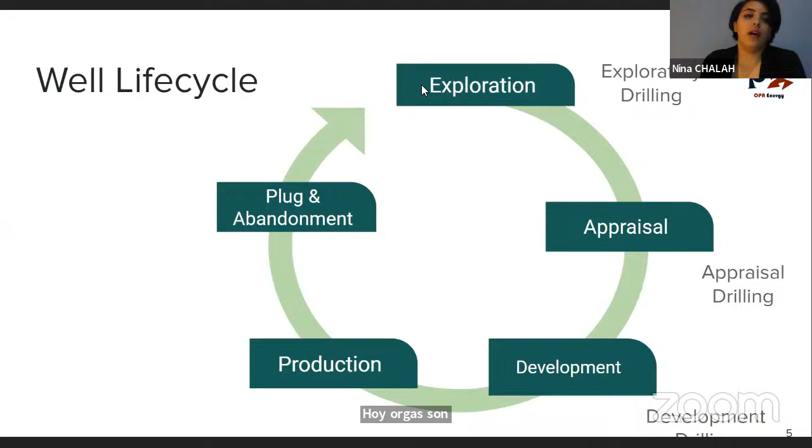So what they do is mainly making assumptions about whether we have oil or gas. So we have what we call seismic data acquisition, and the geophysicist guys are there to make what we call percussions. So how can I say it? Like they beat the earth, like this, and they are getting what we call seismic data.

And based on this seismic data, there is a whole interpretation in geophysics, but it's not the topic of today, and it's not my major though. So they are processing the data we are getting from the seismic activity, and we are interpreting it. Once we are done with this, we are going to tell the drill engineer if yes, there is a probability to find oil or gas underground.

Okay, so after this we will begin with what we call exploratory drilling. So mainly, this is the first operation to confirm if there is oil or gas underground. So exploratory drilling is quite difficult because we do not know the nature of the rocks we are dealing with. We do not know what's underground. So mainly exploratory drilling is here for this purpose, in order to explore what is underground.

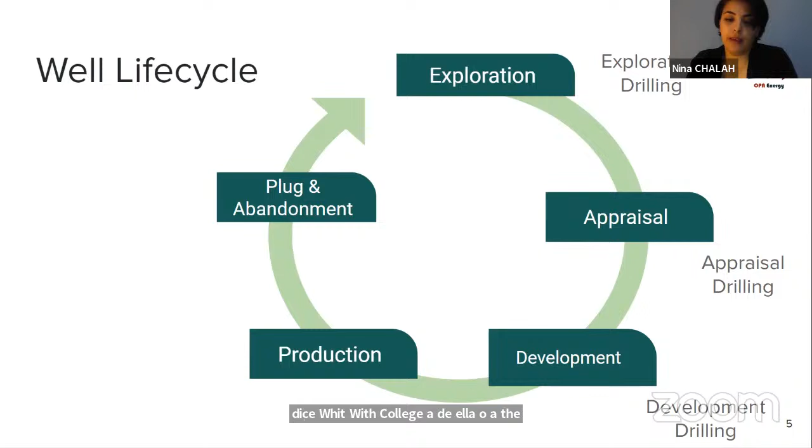which is development. So there is what we call development drilling. This part is mainly made in order to drill more wells and to get to produce. Okay, so this is why we call it development. We are going to develop the area or the field. After this, there is production, and during production, we will have to pump the oil or the gas from the well right to the surface and produce it. And it's a whole story, but it's not the topic of today.

And during this same phase, we will also have what we call EOR stimulation in order to enhance the productivity of the reservoir. So it's also not the topic of the day, but just in case. After this, we have plug and abandonment. So everything dies, even an oil well. So after we produce from it, and the reservoir does not have that power or that pressure to produce, we are going to plug it and abandon it.

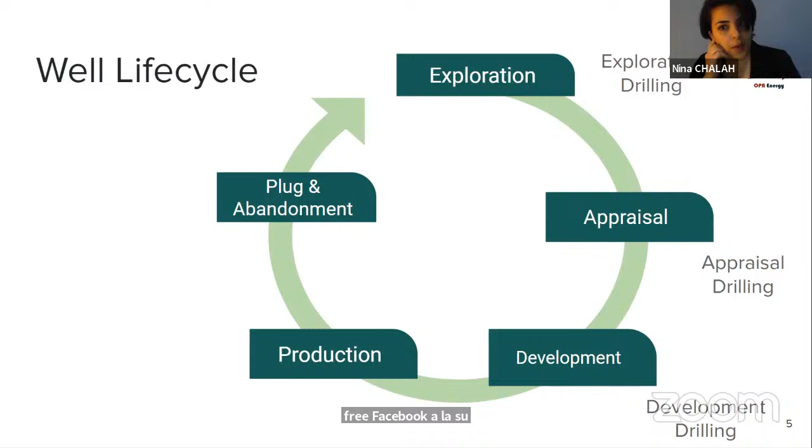Yeah. So as you see here, drilling is actually in the first three phases of the well life cycle. So a drill engineer, a drill supervisor, drill crew are actually intervening in all the first three phases of the well life cycle. Okay, so to summarize, drilling is mainly constructing a well, and we construct this well in order to explore, assess, as we said in the appraisal phase, or develop a field to produce oil and gas. As simple as it is.

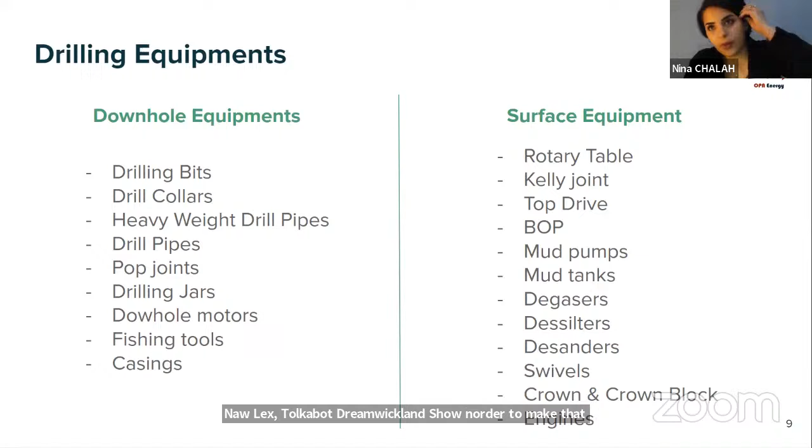Now let's talk about drilling equipment. In order to make that hole, we are using a lot of equipment. The principle is the same everywhere, but the technology is not the same. We may use the old drilling, mainly using Kelly joints and rotary table, or today's version, which is using the top drive. The system is the same, but using the Kelly joints will require a lot of time.

And actually, the top drive is here to help us make fast assembling of the drill pipes. So the top drive is a technology replacing the Kelly joints and the rotary table. So I split the equipment into two types. We have the equipment we are using downhole, and the equipment we are using at the surface.

Okay. So let me check the chat first.

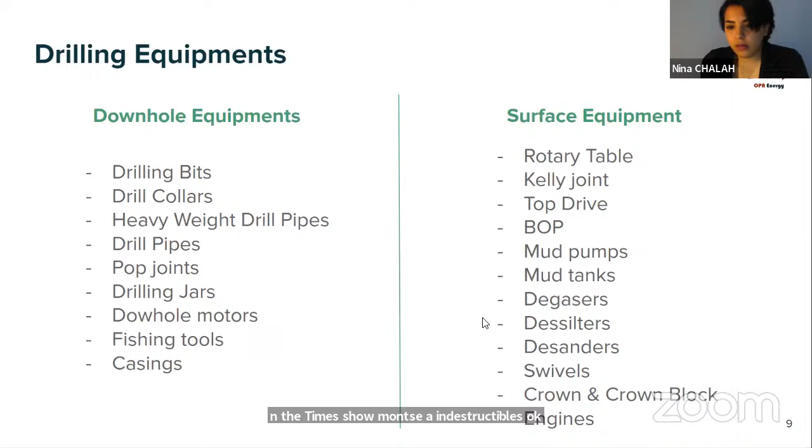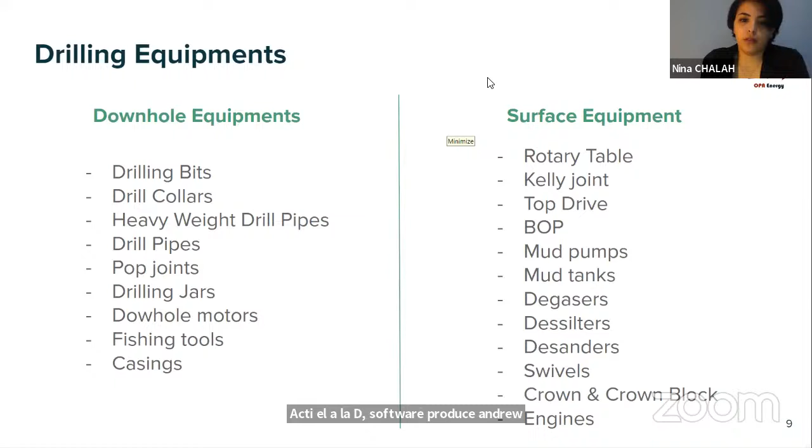Drilling is part of oil and gas production? No, it's not a part of it. Actually, production, as I explained, comes after the drilling. So we are producing right after we made the hole. We drilled it. Yes. So reach the production reservoir exactly. That's it. So let's get back to the slide.

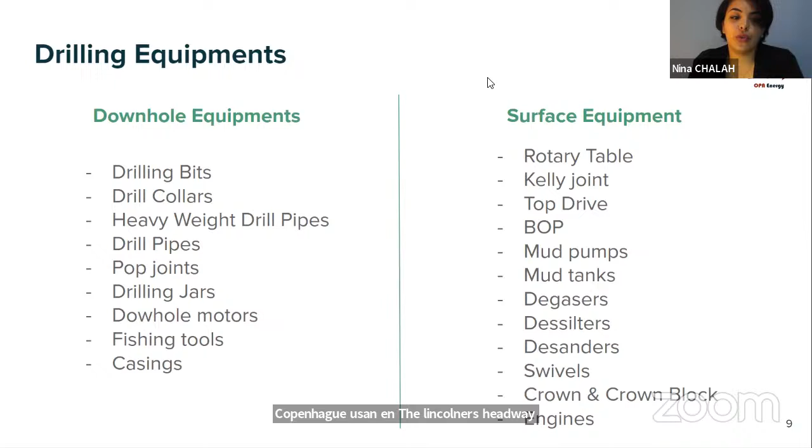So what we have here, as I told you, is what we call downhole equipment. It's mainly all the equipment we are using downhole: drill bits, drill collars, heavyweight drill pipes, pup joints, drilling jars, downhole motors, fishing tools, casing, etc. The drill bit is the first equipment that is here to drill, and it gets into contact with the rock. I will show you in the next slide some pictures of it.

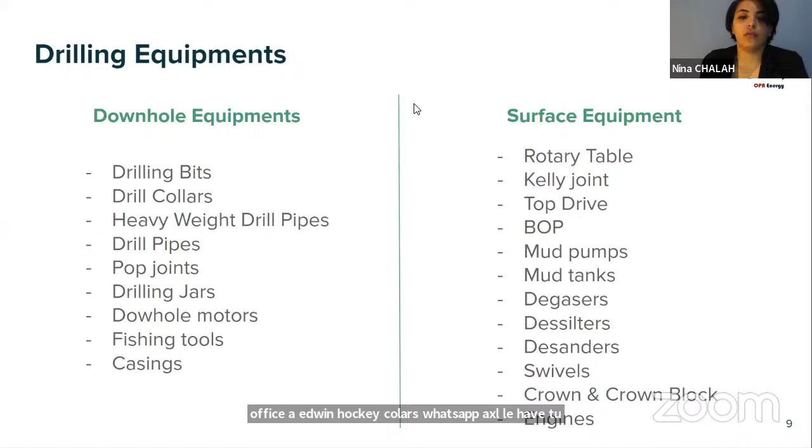And we have drill collars, which are heavy drill pipes, used mainly to provide weight to the drill string. Sorry, I need to accept this guy.

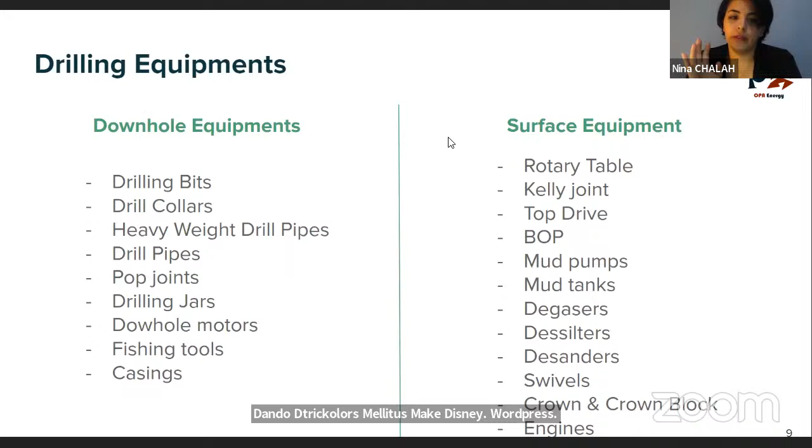And we have heavyweight drill pipes that are here to make a transition between the heavy collars and the drill pipes. It's less heavy than the drill collars and heavier than the drill pipes, so they are here mainly to make this transition. There are what we call pup joints, which are small drill pipes, mainly used for the need. A drill pipe nowadays can have about 30 feet, and the pup joint is less than that.

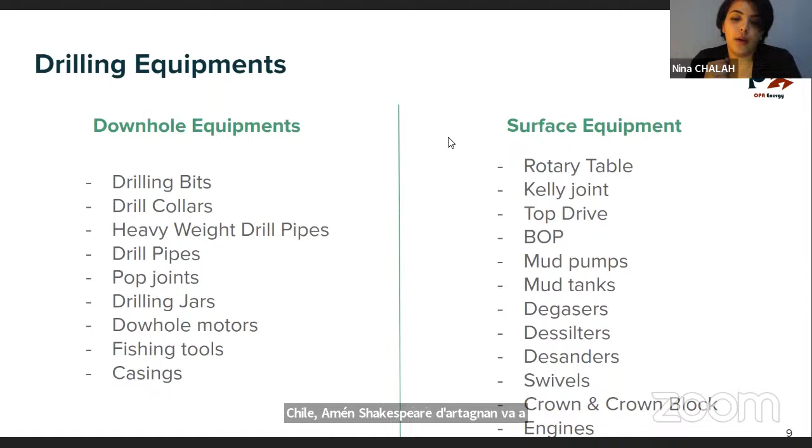So it depends. Then jars are mainly used when stuck. We have hydraulic jars and mechanical jars, and these tools are mainly implemented to provide some shocks to the stuck pipe zone. Yeah. We have also downhole motors. These motors are

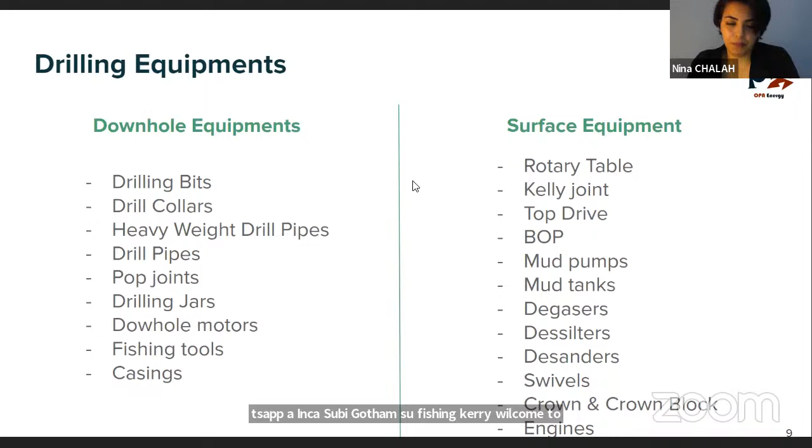And we have LWD tools, which are here to gather some logs, so it's logging while drilling. We have also fishing tools: overshots, baskets, and so on. It's another topic, I cannot really explain the fishing tools, but they are used in case we get a fish downhole. A fishing crew will come to the location and run these tools downhole in order to fish the fish. Yes, and we have the casings.

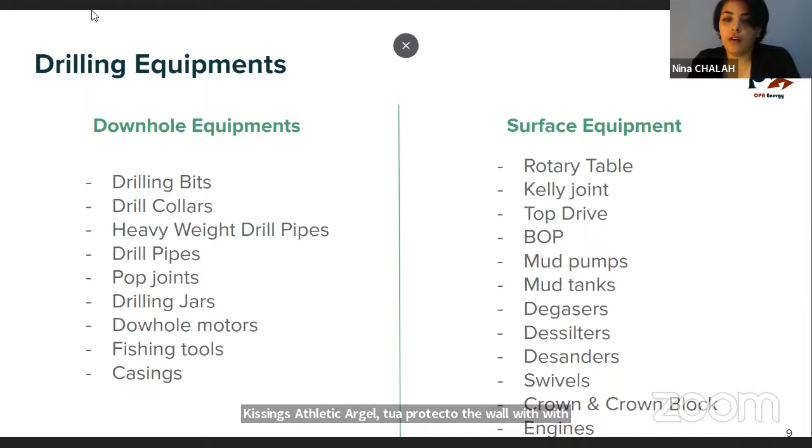The casings are here to protect the well while we construct it. As I told you, there is also surface equipment: rotary table, Kelly joints, top drive, which we are going to see in the next slide, BOP, mud pumps, mud tanks, degassers, desilters, desanders, swivels, crown blocks, and the mobile crown also. And we have, of course, diesel engines we use on location to run all of this equipment.

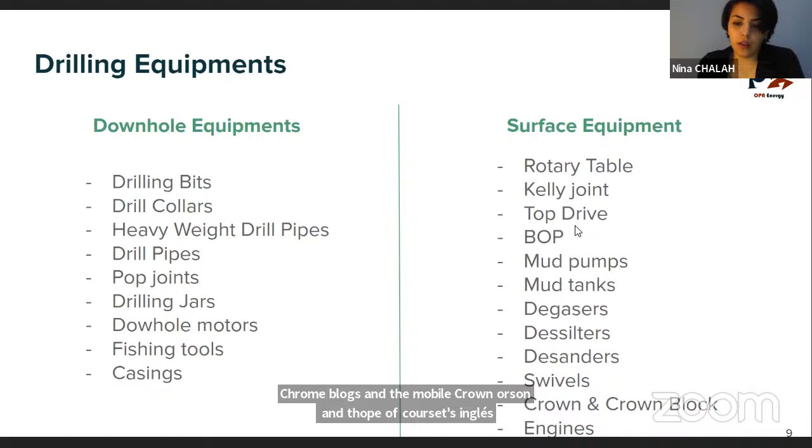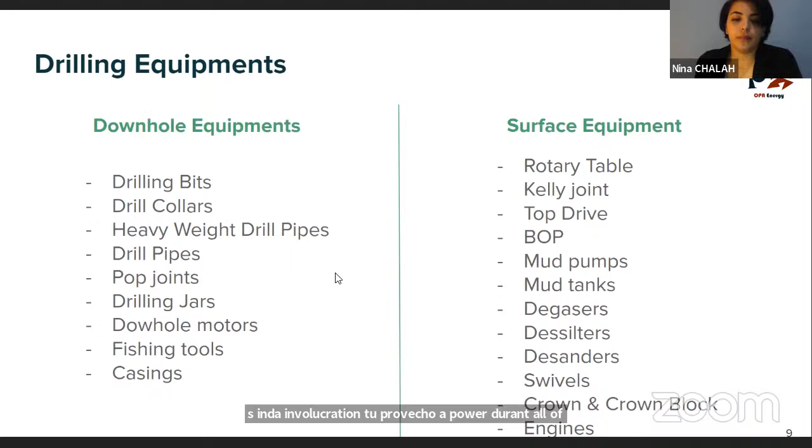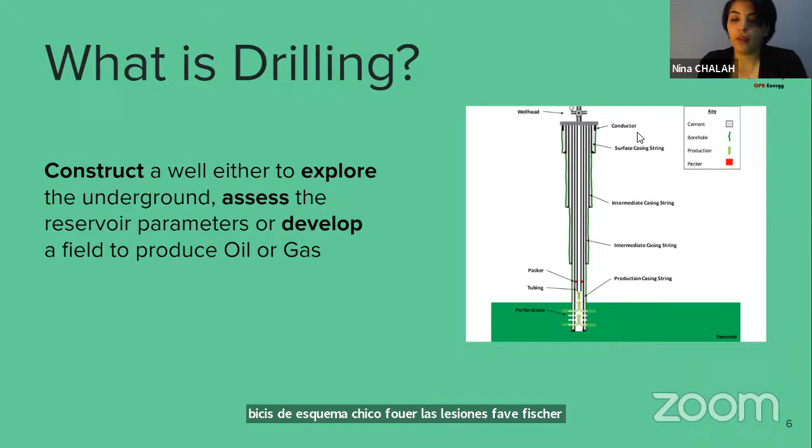So we have surface casings, we have intermediate casings, and production casings. We have also liners. It's not here, but actually this is the schematic of a well. Mainly, we have, let's name them, five phases, counting the conductor pipe. Okay. So let's get back to this slide. I think that I am done with it.

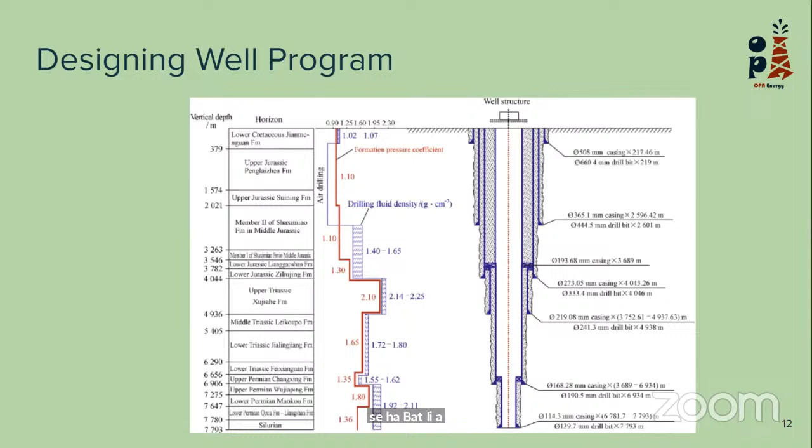Here they are using first air drilling, which is actually a type of drilling. To be honest, from my side, I didn't see this air drilling, but it exists. So actually, we are pumping air or gas in the well. We use this air drilling mainly for the first phases. Okay, right after this they are using, this is the formation pressure.

So they are using drill fluid, so they are using mud with its density. As you see here, 1.4 to 1.6. So we are going to actually construct this well in this manner, using mud, and the design of it is all about what we call a mud window.

So we have what we call a collapse pressure, and we have a burst pressure. This is for casings, and we have also the pore pressure and the fracture pressure. We have to make sure that our ECD, or what we call equivalent circulating density, is in between these two, pore pressure and fracture pressure. Okay.

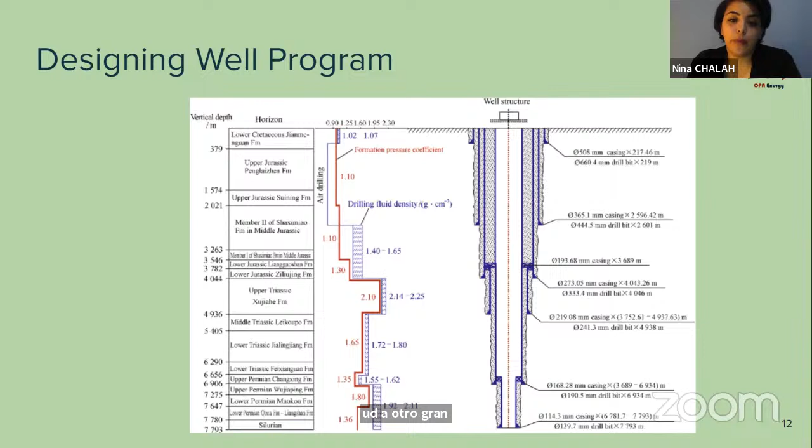So actually this is the first task of a drilling engineer, to elaborate this kind of program, to be followed, of course, by the drilling crew on site and the drilling supervisors. Also the drilling engineer is here to help many servicing companies in providing what we call directional drilling plans.

As I mentioned, not all the wells are vertical. We have also horizontal wells, and in order to build these horizontal wells, we have to use, as I told you, mud motors and all the stuff of directional drilling, and the drilling engineer is here to help on this. He will tell the servicing company if the directional drilling plan is okay with the initial program, and so on and so forth.

What we have to mention is drilling engineers are mainly working for servicing companies and also for operators. They are here, as I told you, to elaborate a program to be followed. In the drilling program there is also what we call the drilling fluid program. There is a whole servicing activity which is centered on the drilling fluid.

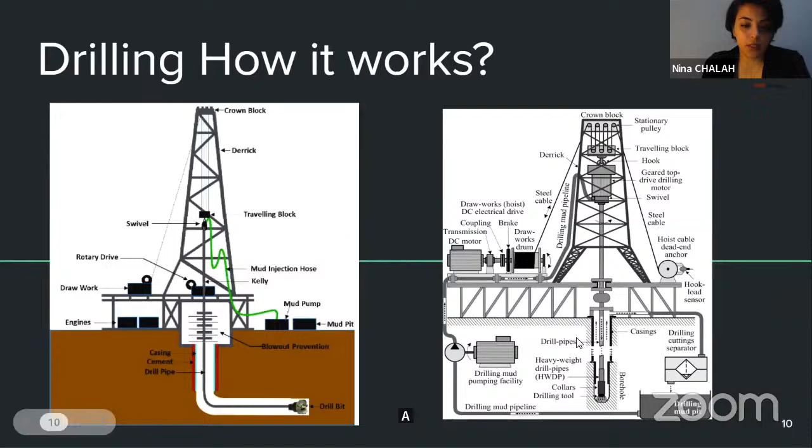Cementing is a whole engineering activity, though, with a whole set of parameters around it. It's not our topic of today, but in case. And we have also drill bits. This is the drill bit, as you see here, at the first part. It's the main tool that comes into contact with the formation.

We have a lot of types, including PDCs, tricones, and so on. It's not our topic of the day, but on the drilling side there is what we call a bitman or bitwoman, who is in charge of following the drilling performance of the drill bit. These bits are provided by servicing companies, who are there to follow up with ROP optimization and so on.

It's another topic, but there are whole studies on drill bits, how we choose them and how we implement them during drilling operations. Okay, so the drilling engineer is here to validate all of these parameters before drilling the well. The drilling program needs to be well prepared and ready right before beginning the drilling operations.

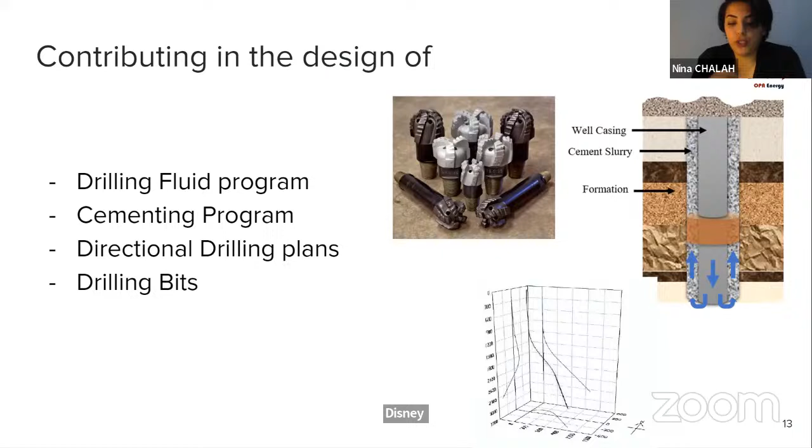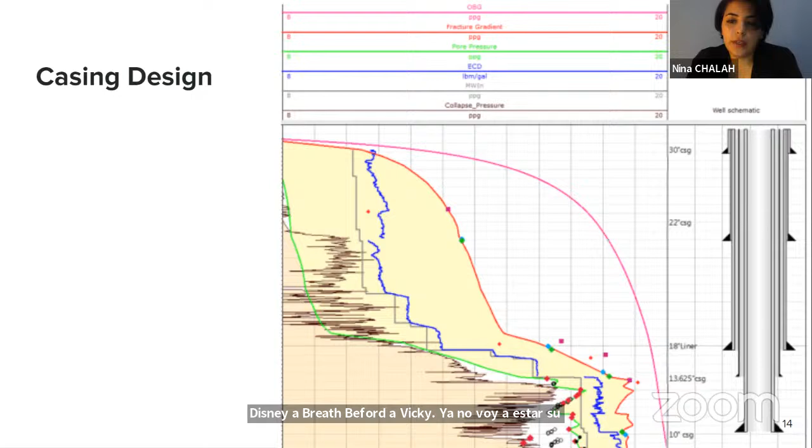Okay, there is also what we call casing design, which is super important. As I told you, the casing is here to protect our well, and we need to implement and use the right one downhole. It comes in a lot of varieties and types. The casings are super various.

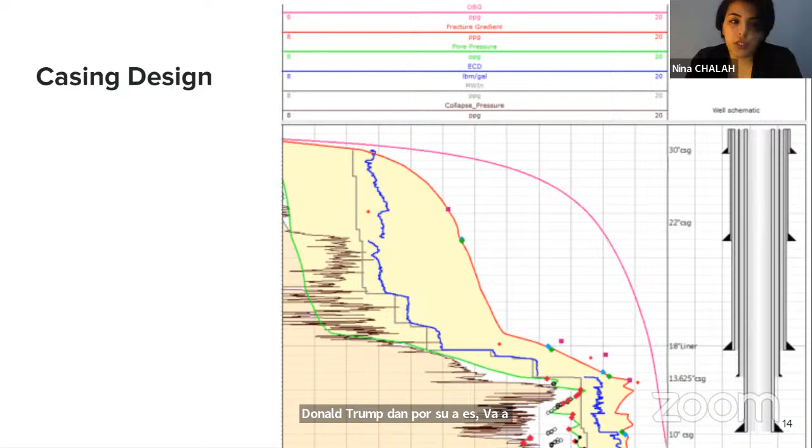But the engineer is here to make sure that we are using the right casings in order to ensure, as I told you, the well integrity. So there is a whole study, and it all begins with what we call the mud window.

So there is what we call the formation pressure or the pore pressure, here in green, and there is what we call the fracture gradient, here in red, and there is what we call the ECD. So I told you that ECD is the equivalent circulating density. What is the equivalent circulating density?

It's not an exact science, but it's the density the drilling mud is having downhole during circulation or in dynamic conditions, right? So we need to make sure that this ECD is between these two: the pore pressure and the fracture pressure. Okay, and the casing, in order to elaborate this casing design right after the drilling operation. So the ECD, I told you, should be in between these two.

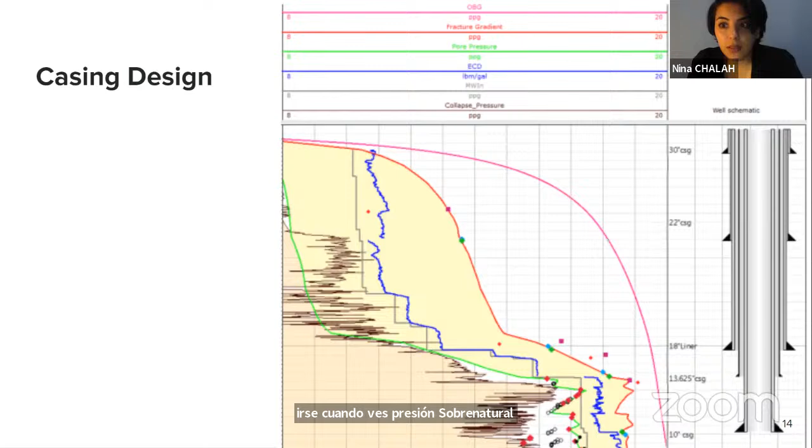When we are ending up with the drilling, we are going to case the well. So we are going to run these casings. And there is a whole study of collapse pressure and burst pressure. So we need to make sure that the casing we are running downhole won't be collapsing after we cement it, and won't be bursting after we pump either cement, slurry, or something else downhole.

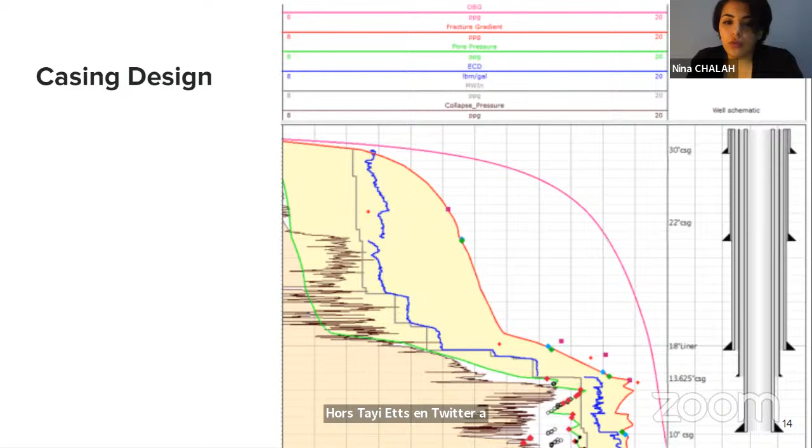So it's a whole study. It's something that is really made for purpose, and the drilling engineer is here to make sure that we are going to use the right casings. I hope that you understood this, but in case you didn't, we will come back to it after I finish my presentation. Okay.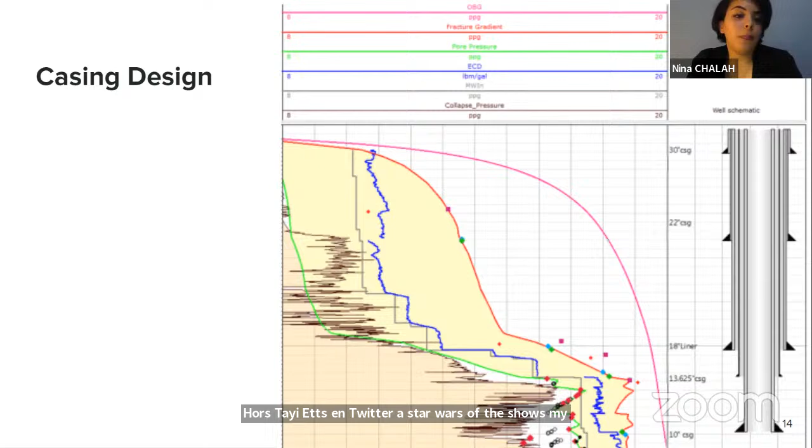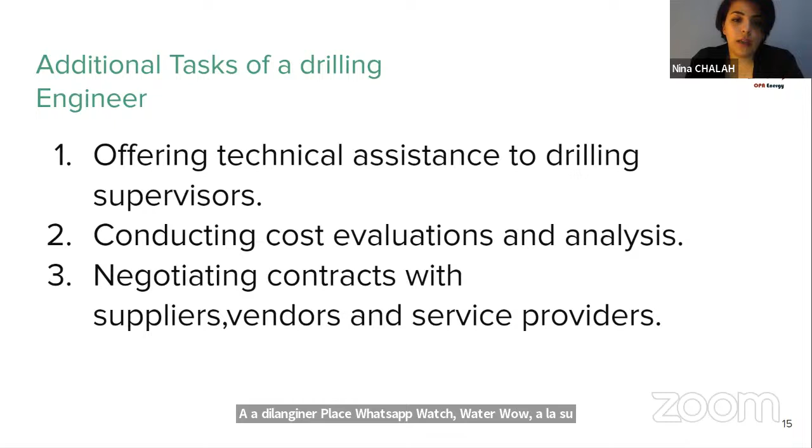Actually, these are some additional tasks of a drilling engineer, plus what we mentioned, I mean the elaboration of the drilling program. So actually, the drilling engineer can be a drilling supervisor, by the way. He can go to the well site and assist the drilling supervisor. And also, the drilling engineer is here to conduct some cost evaluation and analysis, which is super important because there is what we call NPT, non-productive time.

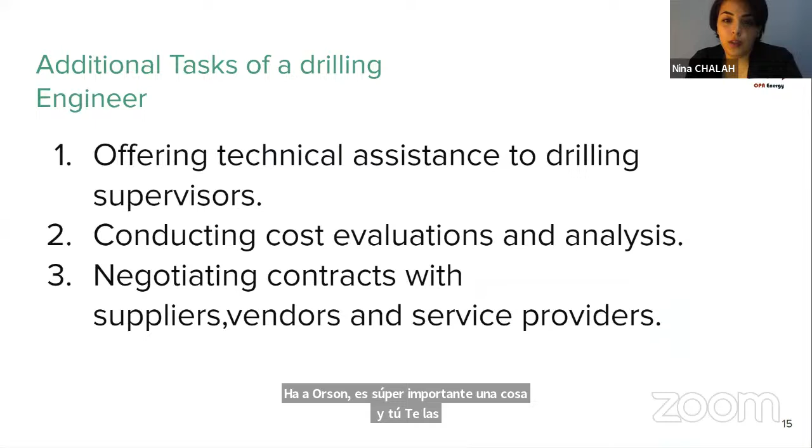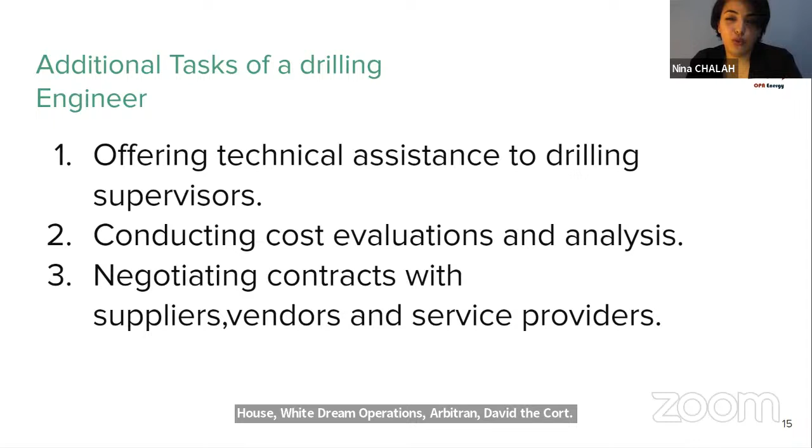And a good drilling engineer is here to tell us, if we have this much NPT, how we are going to spend money for it. And it's super crucial. This is why drilling operations are a bit difficult, because they are related directly to money. So time in drilling is money. So it's super important to conduct the operation in the time lapse mentioned in the drilling program. So we have to pursue it.

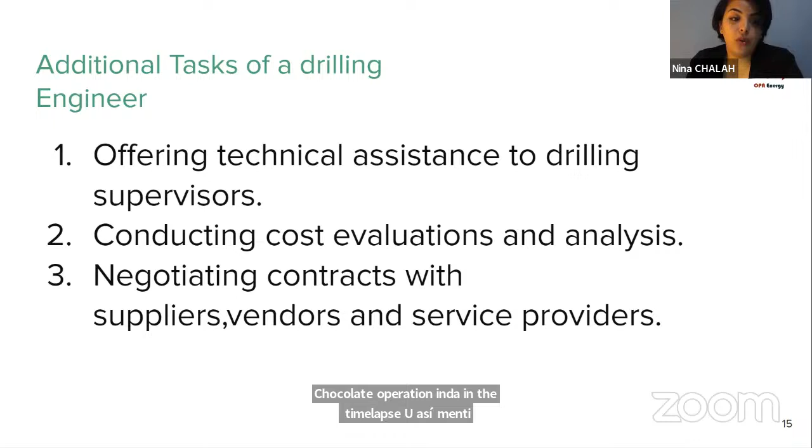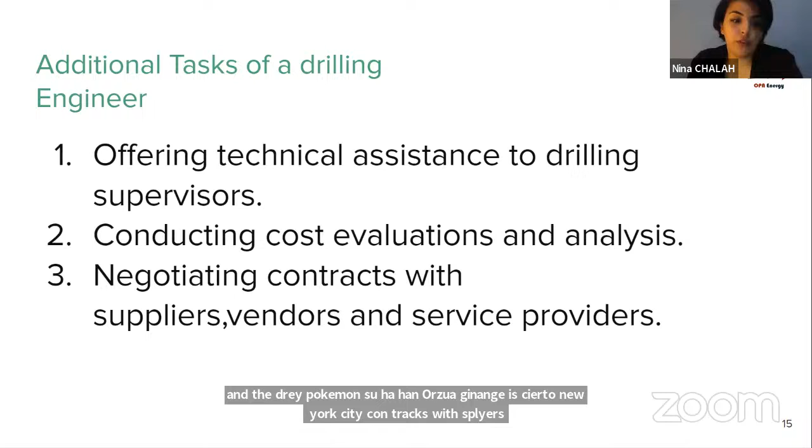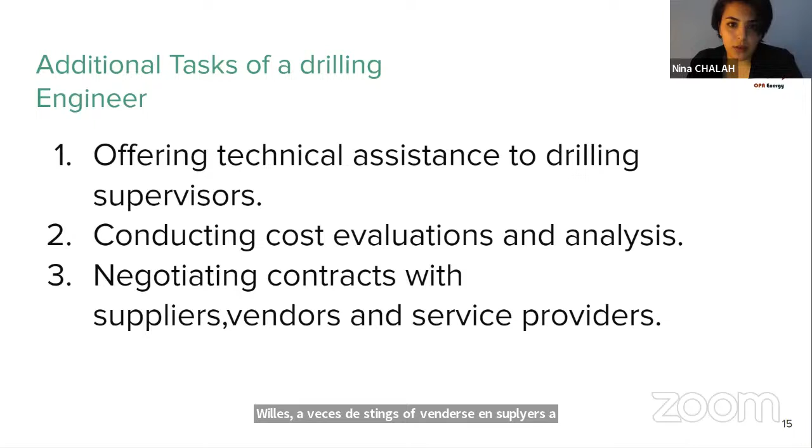Yes. So let's jump to the last part of our presentation, which is drilling technologies. I tried to enumerate some of them because, as I mentioned earlier, drilling is something that is evolving. It's quickly evolving, and every day we are having new technology implemented in drilling. So I tried just to enumerate some of them.

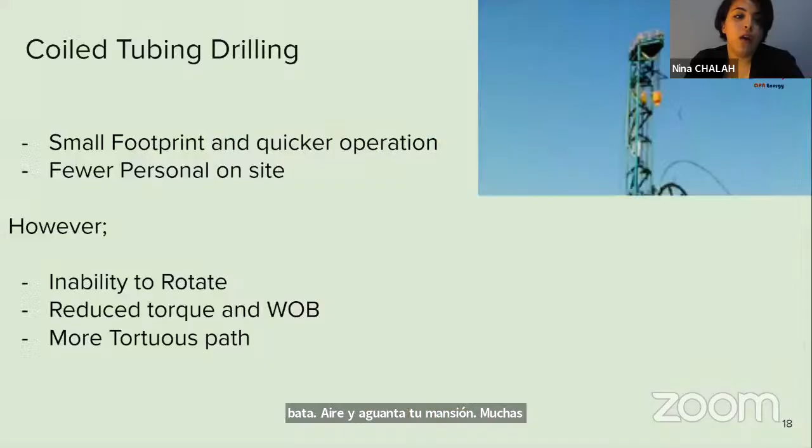We also have coiled tubing drilling. Actually, you saw all the equipment I already mentioned, the surface and the downhole equipment. This equipment can be minimized, or not used to drill a well, mainly when we have coiled tubing drilling.

So it's a good alternative to conventional drilling, but it's still not usable for all wells. We have to mention this. So actually, I don't know if you are familiar with coil tubing, but coil tubing is mainly an intervention. So we are running, as you see here, a coil, and we are running downhole. Either we pump nitrogen, mud, water. It depends on the intervention, but we have a whole system to pump and to slide in the well, but we don't have a system to rotate.

I don't know if I mentioned it earlier during this presentation, but in order to create a hole, we need 3 functionalities. So we need to pump the mud or the water or whatever. We need to rotate. So actually, mainly this rotation is provided by the rotary table or the top drive, as I mentioned, and we need some weight in order to slide, in order to advance on the drill, in order to create the trajectory or the pathway. Okay, and in the coil tubing, we are just having the pumping and the sliding part.

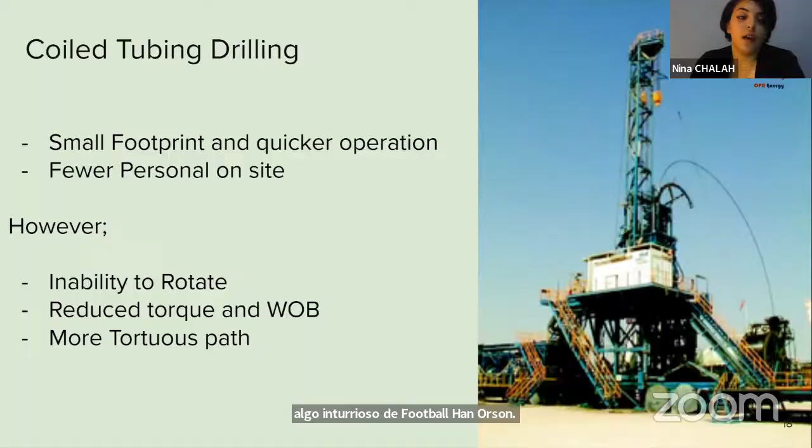So as I told you, we are going to implement less equipment. So we are going to reduce the footprint. And also we are going to have less personnel on the site, so less danger for them and so on. Okay? We have also managed pressure drilling. So actually, it's another story, but it's here in order to manage the pressure downhole while drilling.

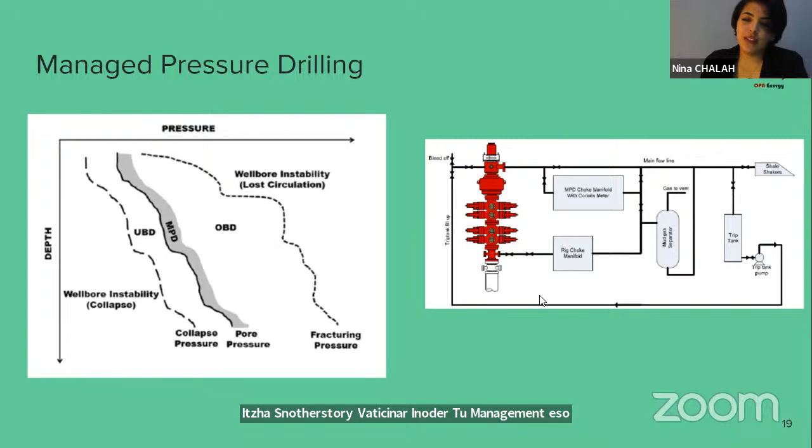So actually, this is the surface set of equipment of a managed pressure drilling operation, and what we are going to do here is, as I told you, manage pressure downhole, especially when we are having a tight mud window. So this is the mud window. It's the depth versus the pressure. So as I told you, there is the fracture pressure, the pore pressure, and the collapse pressure. Actually, the collapse pressure, obviously, will be less than the fracturing pressure. But what I mean is when the collapse pressure is near to the fracturing pressure, and we cannot really change the drilling mud weight during the phase.

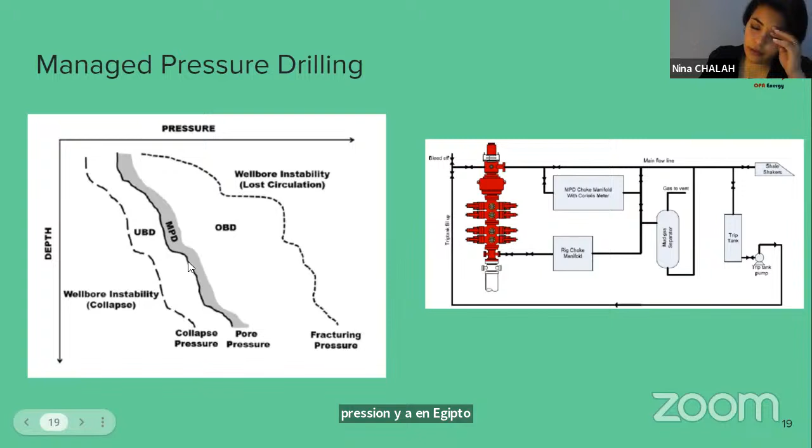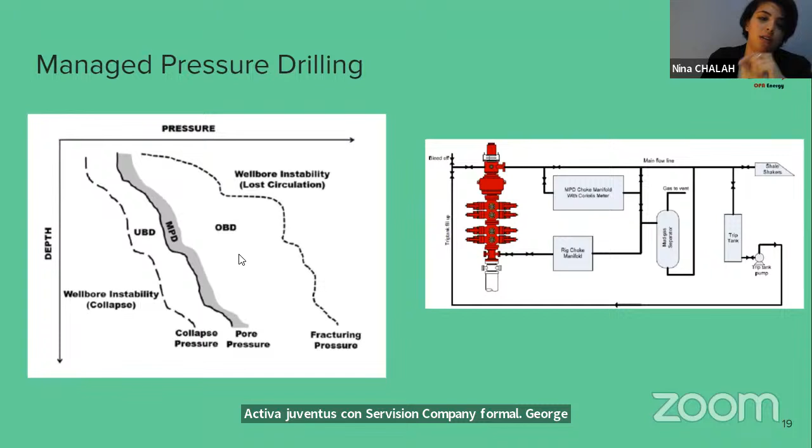What we are going to do is, actually, we are going to call a servicing company for managed pressure drilling. It's happening in seconds. Like, we are changing the pressure downhole within seconds, and it's a good alternative to avoid all the lost circulation problems, the stuck pipes, and all the problems related to drilling mainly.

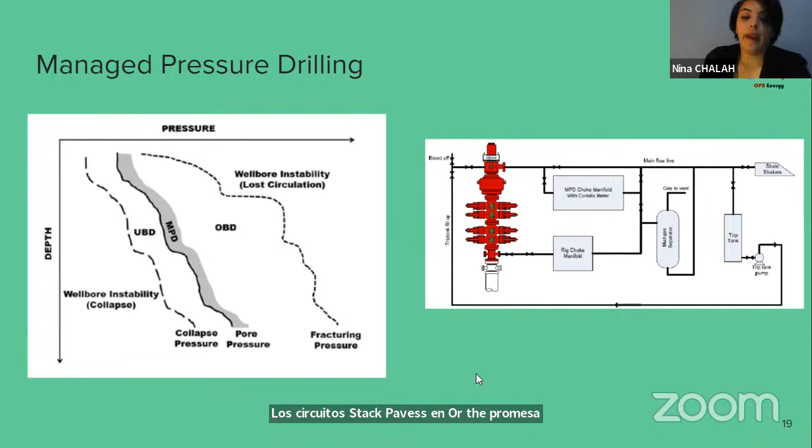Okay, and also we have digital drilling, which is something I am truly impressed by, and I am truly passionate about it. So as I told you, drilling is evolving, and there is what we call drilling 4.0. So the coming of artificial intelligence in all the industries, including ours, petroleum engineering, is having its impact.

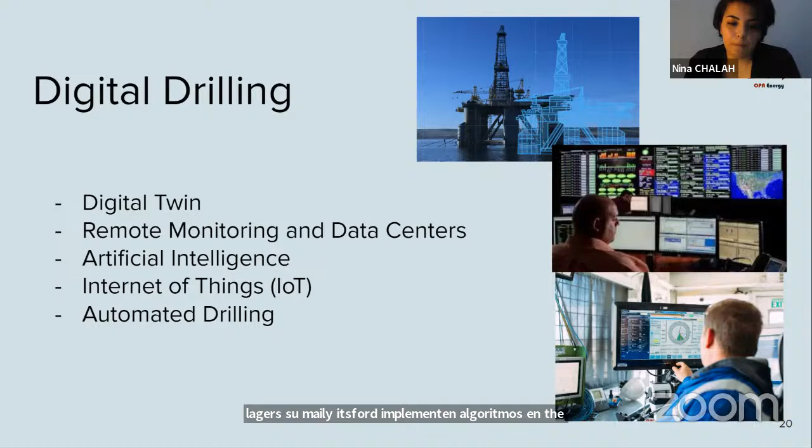So mainly it's for implementing algorithms and discovering patterns on this topic of drilling optimization. For example, what I did during my master thesis is I discovered a pattern in order to tell the driller if we are going to get stuck using this set of drilling parameters or not.

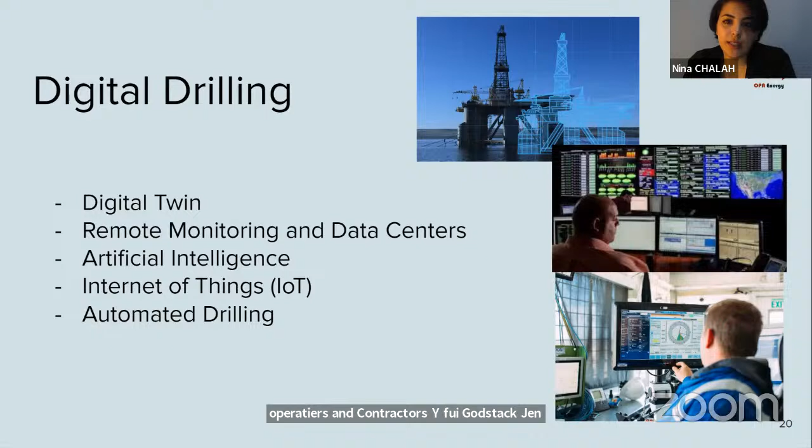It was a good work, not because I did it, but actually it will be a cost saving and time saving for both parties, I mean operators and contractors. Because if we get stuck during drilling, it's a nightmare, believe me. We can go to fishing, we can have a lot of problems after getting stuck. So better to not get stuck. Stuck pipe is when our drill string is stuck, so we cannot move it, we cannot rotate it, and it will be really difficult for us to remove it from the well. And yeah, it's actually a big issue of our industry.

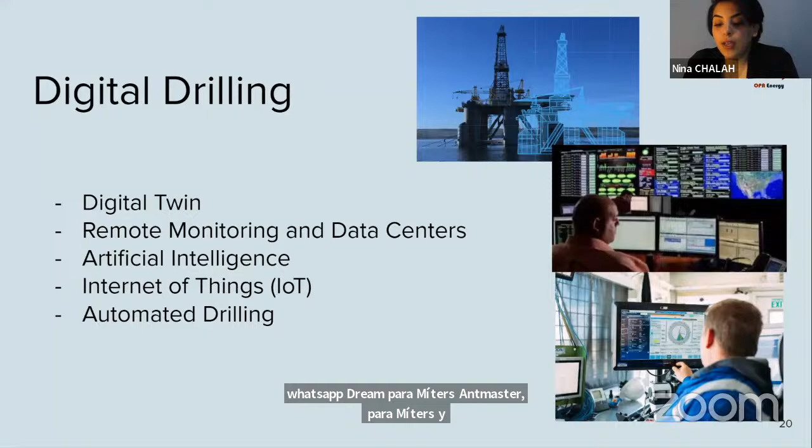We have also IoT, which is Internet of Things. I don't know if you guys are familiar with this, but it's here to implement in devices. During drilling, we acquire a lot of data, including mud logging and drilling logging. So we have drilling parameters and mud parameters. If we can implement these IoT devices on each single sensor we have during the operation, and get it transferred to a center in which we mix it with some artificial intelligence and optimize it in real time, we are going to save the game.

In Algeria, we are not that centered on digital drilling, but worldwide it's something that is taking a good move, especially when we have NOV drilling rigs. NOV is a company that is well equipped with these technologies.

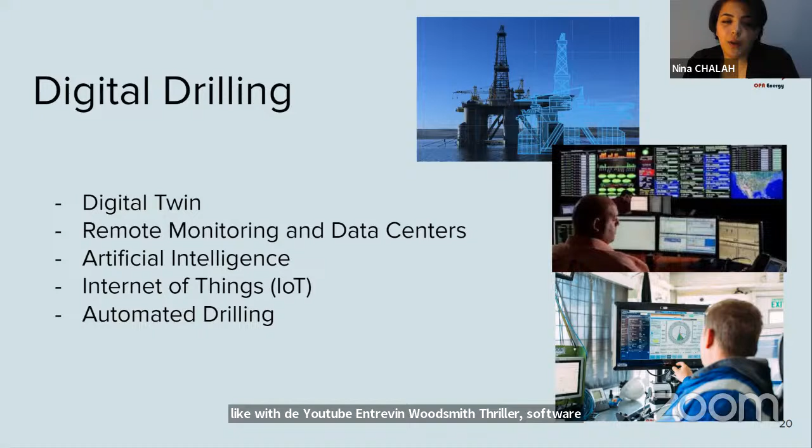Okay, and we have automated drilling. I don't know if you know Nabors drilling. Automated drilling is like an automated pilot, where the human does not have to intervene. We do not need a driller, we put it on automated, and it will make its decisions alone. It's something that is really interesting, but it's not recommended, especially for exploratory drilling.

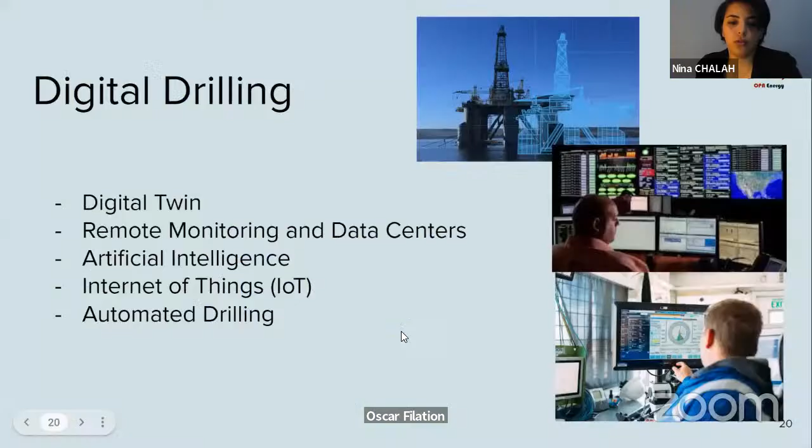Firdaus, are you here? So you can understand my explanation. Please raise your hand if you are here, or unmute yourself. Wait, let me check the participants. Yeah, she is here, I think. Okay, or he is here. I don't know, to be honest.

Actually, making a drilling program is a good teamwork project, you see. So the reservoir engineer and the geologist are all here to help. Once we get this first data, which is the diameter of the liner or the production casing, we are going to decide on the casings above it. Okay, we are going to select diameters.

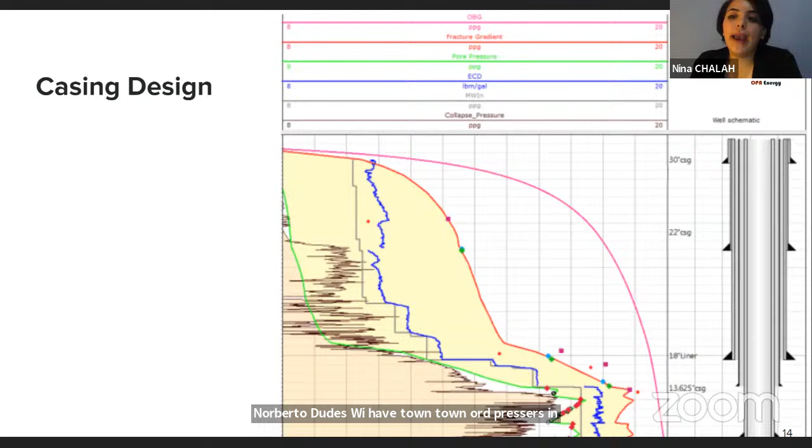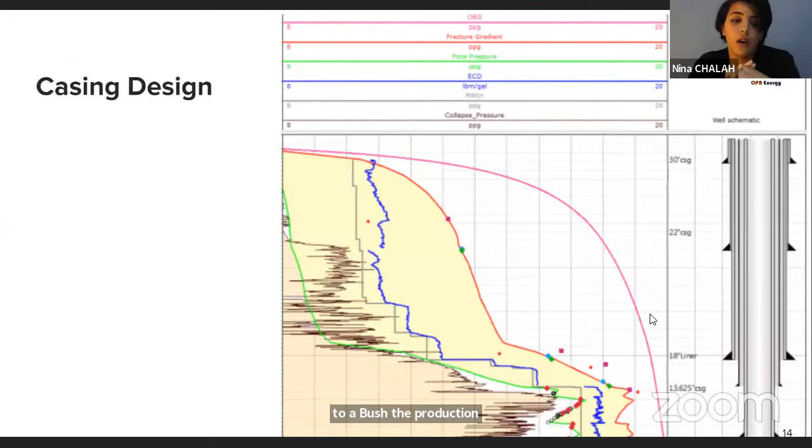In order to do this, we have to compare the mud properties or the pressures in the wellbore and the casings, the grades or the types of the casings. We have the drilling handbook. It exists on the internet. You can search for it and you will find it easily. And we will make collapse studies, burst studies, and tension studies. And based on these three things, we are going to decide on the diameter of the casing we are going to implement above the production casing or the liner. Okay, I hope that I answered your question, but mainly this is how it works, the casing design or the casing selection.

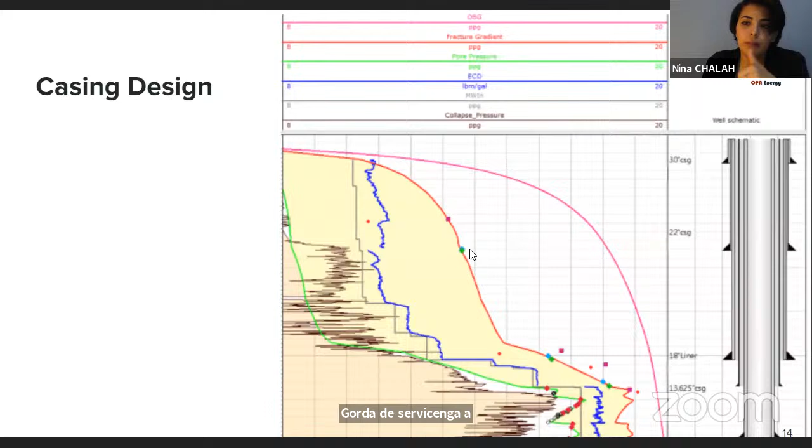There is what we call well construction engineer. It is the same as drilling engineer. Yeah. Actually, in SLB or Schlumberger, there is a business line named well construction. So when we say well construction, we mean drilling and all the servicing around. I mean, drill bits, drilling fluids, cement, and all the stuff. Okay, directional drilling. So yeah, this is how we can name it well construction, if it's okay for you.

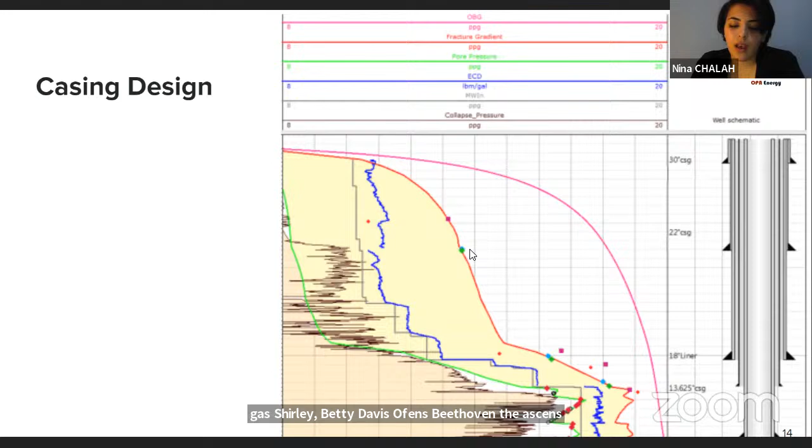What does it mean to land a casing in competent shale? Actually, it's another topic. Land casing. So actually, shales, gas shales or oil shales, it depends. There is a difference between the sandstones and the shales, and shales have some critical parameters to take into consideration. So it's mainly oriented to geomechanics, elasticity of the rock, and all the stuff. I won't dive into it today, but maybe in the next sessions.

But land casing competent shale. I don't know what you mean by competent shale, but the casing operation in a shale is a bit different from the casing in the sandstone, because shales are quite different from sandstones. Actually, the difference between sandstones or rocks in general and shales is their permeability. Okay, so shales have really small permeability, and they also have a problem of elasticity. We need to take this into consideration, but it's mainly done by implementing geomechanical models, and it's quite different, as I told you. But please, by competent shale, I don't understand this term.

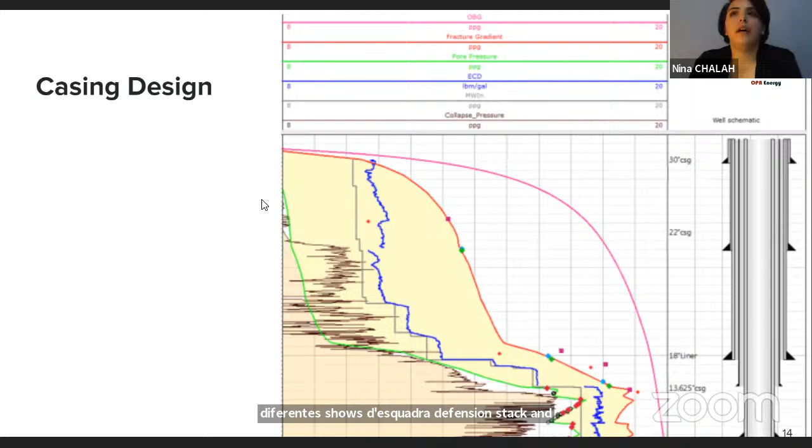What can you do in case of stuck pipe and in case of kick? Oh, good question. When we have a stuck pipe, there is a process of remedial actions, and stuck pipes are different. So there is what we call differential stuck, and there is what we call mechanical stuck pipe. And the remedial actions of these two are quite different. First of all, it depends on the situation, because the driller and the drilling supervisor are there. By knowing the nature of the rock and the formation we are drilling, we can elaborate a remedial plan for it.

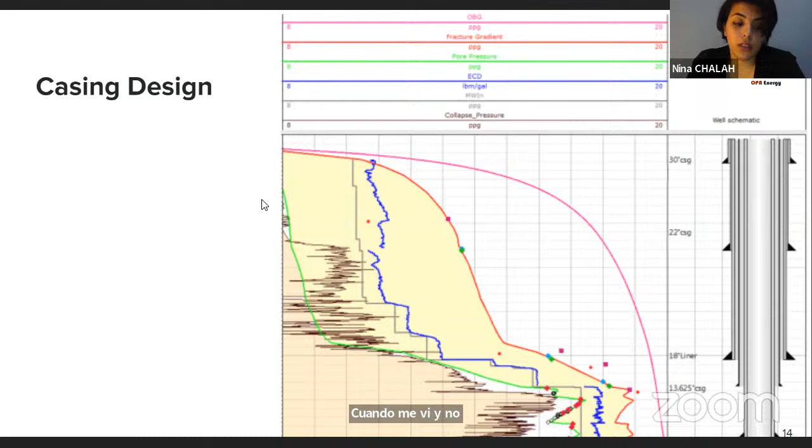But a stuck pipe, especially a differential stuck, is something that we have to tackle very quickly. If time passes, it can be worse. So we can implement jars, hydraulic or mechanical jars, it depends, in order to make some percussions in the well. And maybe we can free the drill pipe. If not, we can also inject acid in order to dissolve the mud around, I am talking about the differential stuck, okay? Or dissolve the cake or the zone of contact between the drill pipe, the drill string, and the formation. And after this, we can try to fish. So we are going to first calculate the neutral point. The remedial actions of stuck pipes are another topic. Okay, I cannot elaborate that much on this, but mainly we will try to do our best.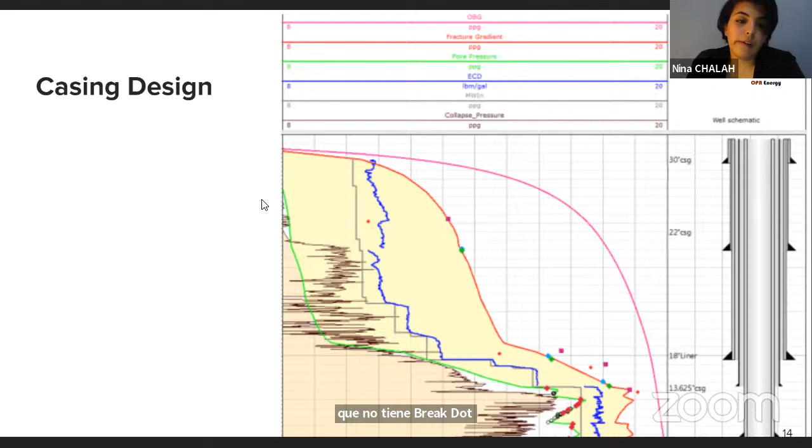In case of a kick, what we are going to do is implement well control methods. So we have the driller's method and the wait and weight method. It depends, but mainly this is what we do for a kick, because the kick can quickly turn into a blowout. So a kick is the eruption we are having in the wellbore.

When we see pressure increasing in the wellbore, but we do not have any blowout yet to the surface. So there is a whole well control method. It's not today's topic, I cannot elaborate that much on it, but this is what we do in case we have a stuck pipe or a kick.

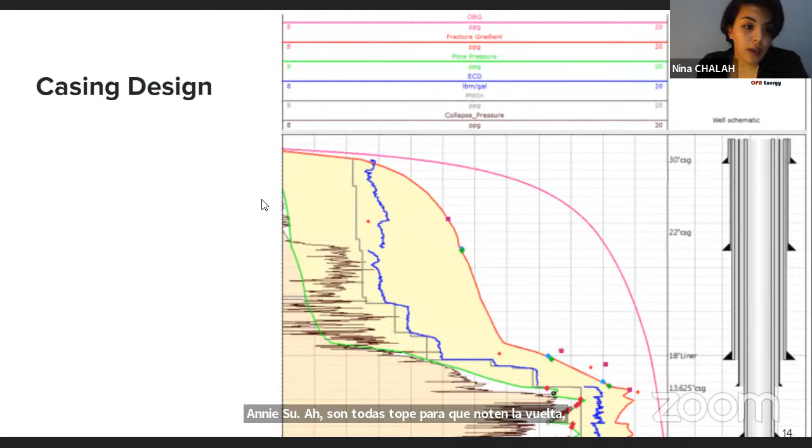Do we have digital drilling technologies in Algeria? So we had RTOC data centers. So we worked on remote control. Actually, there are two companies. I won't be telling their names, but this business is gone in Algeria for the moment. I hope it will come back.

Thank you for your amazing presentation. Most welcome. Thank you for attending today. Thank you, dear.

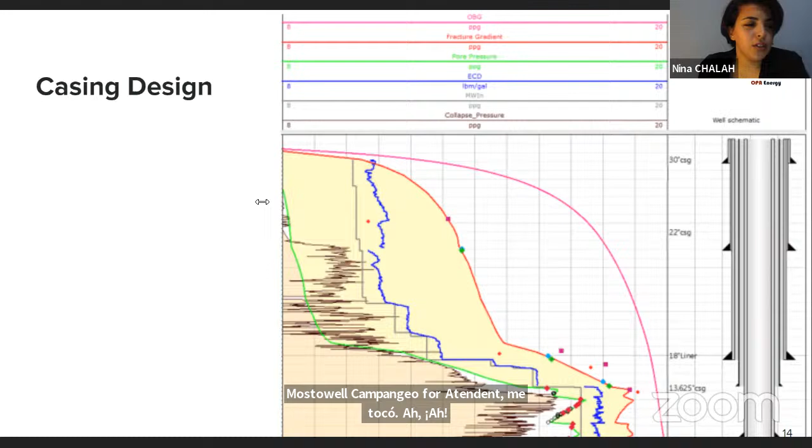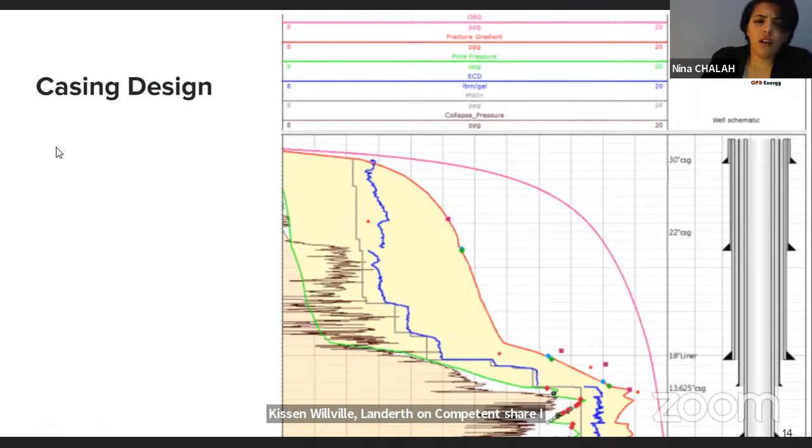There were on-paper meetings where the engineer mentioned that the casing will be landed on competent shale. I believe the formation will be more shale than sandstone. To be honest, it's not how we work in Algeria. In order to decide the landing point of the casing, you can see the mud window on the screen, right? The landing point is actually decided by doing these studies of collapse, burst, and tension.

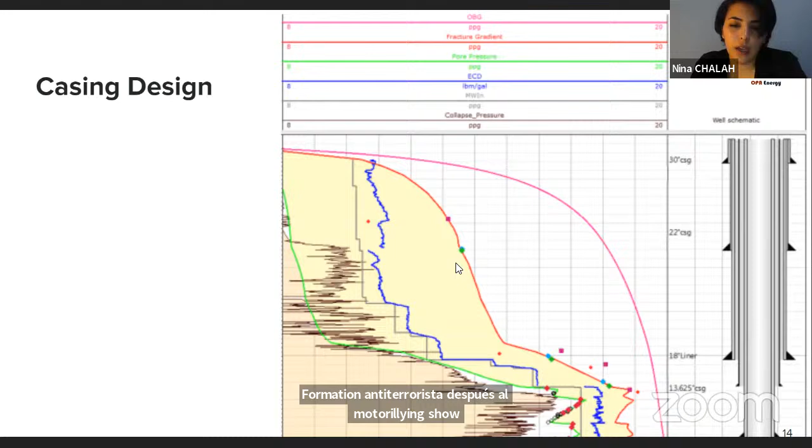We are going to end up with an optimum TVD or TD, the depth at which we are going to land the casing. We also have LOT, leak-off tests, and FIT, formation integrity tests, but these tests are not implemented in every drilling. So based on the casing design and the mud window, we decide on the landing point and where to put the casing shoe exactly. I don't know in which country they work like this, but I'd love to hear more from you.

Success, Khahimi. Oh, sorry, I couldn't spell your name correctly.

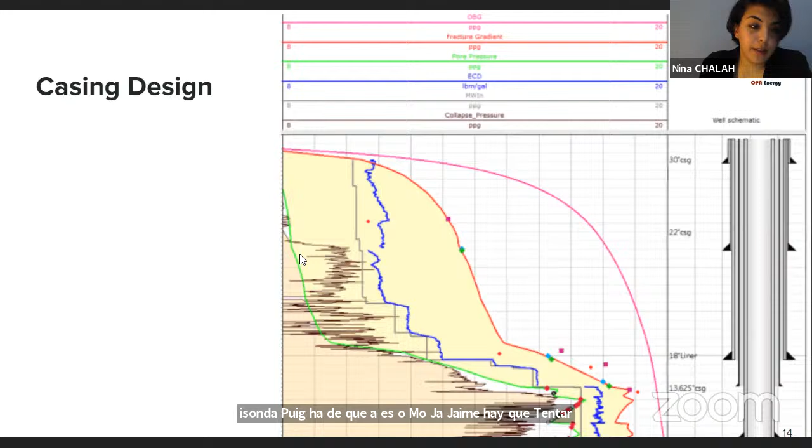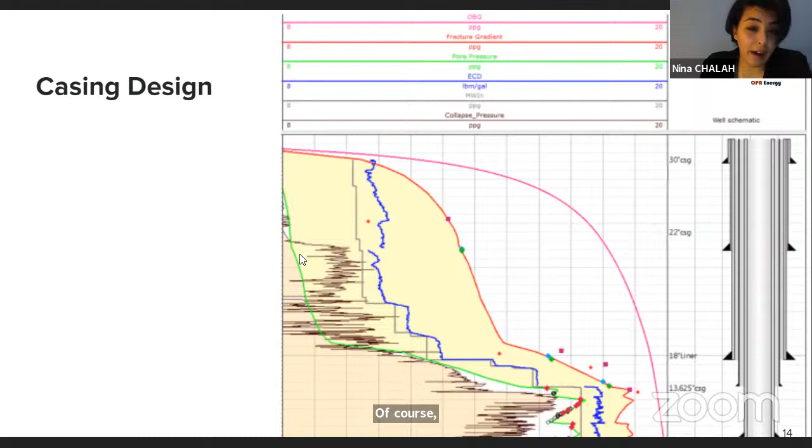Of course, the landing point should be the hardest, but it can be sandstone. It's not really related to shale or sandstone. It should be the hardest. And by implementing this mud window study, we are going to know where the hardest point is in order to set the casing shoe. Nigeria, yeah, I can understand. We are not working that way in Algeria. This is what I know for my part. I hope that I answered your question.